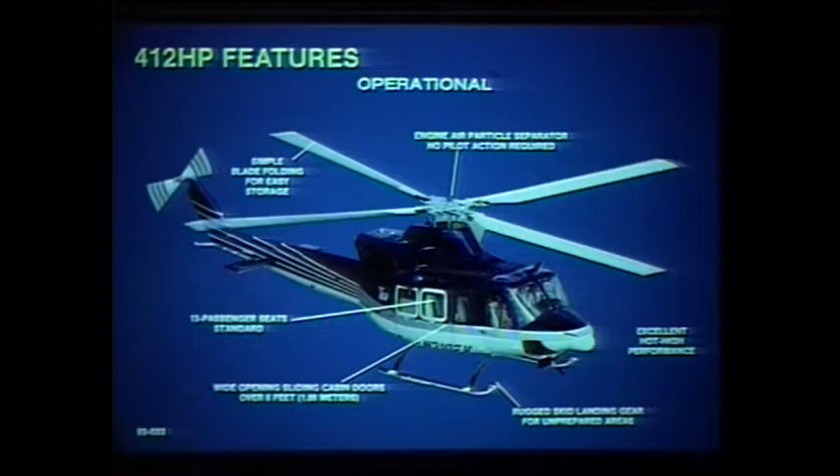Safety is the very highest design priority at Bell Helicopter, and as a result, the 412 is one of the safest helicopters flying in the world today. Main and tail rotor clearances allow safe movement around the aircraft with rotors turning. The Pratt & Whitney PT6 power plant is safe, reliable, and easy to maintain.

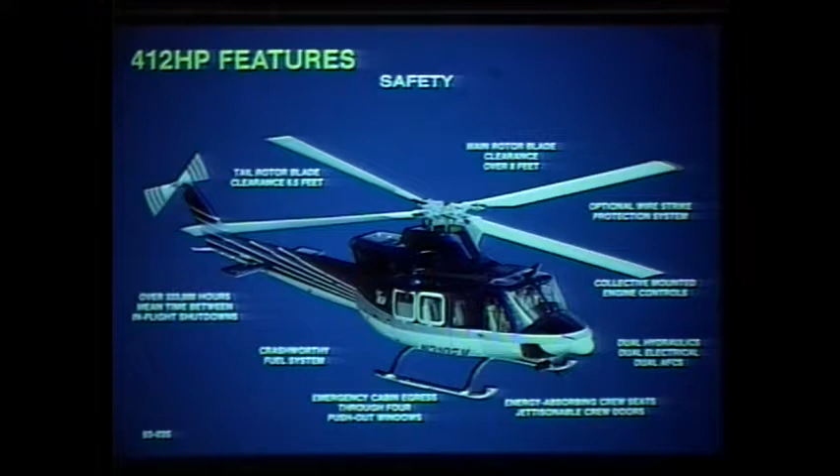Emergency exits are provided by push-out windows in the cabin and jettisonable doors in the crew cockpit. Crew seats attenuate energy to help prevent injury during hard landings. Dual hydraulic, electrical, and automatic flight control systems assure continued safe flight in the event of system failures. Collective mounted throttle controls allow the crew to perform emergency procedures without ever taking their hands off the flight controls. Optional wire strike protection can be added to the upper and lower fuselage to minimize danger of inadvertent wire strikes. The Bell 412 HP, one of the safest helicopters flying today.

The Bell 412 is reliable and easy to maintain. The Pratt & Whitney has a 4,000 hour time between overhaul and 35,000 hours mean time between premature engine removals. The transmission and tail rotor drive systems have 5,000 hours time between overhaul. The main transmission has multiple zone chip detectors to isolate potential problems and debris collectors to prevent secondary damage.

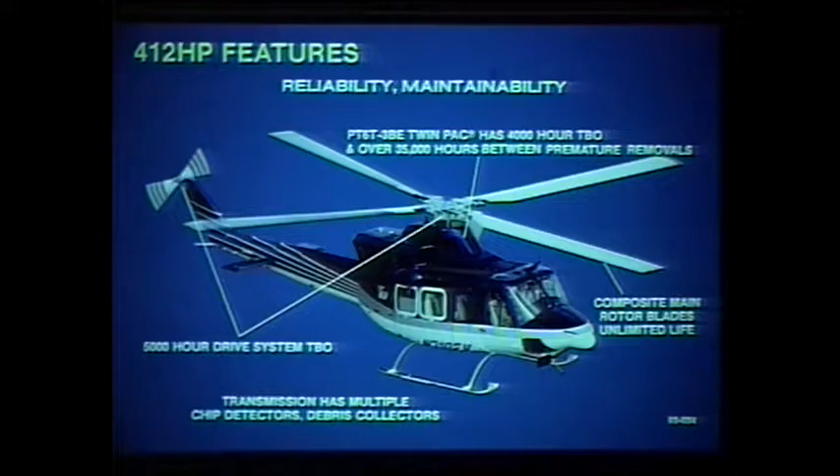The composite main rotor blades have an unlimited life. This unlimited life main rotor reduces maintenance inspections and reduces direct operating cost. The 15-place 412 has a 46-foot diameter, 4-bladed main rotor, large roomy cabin, and large sliding doors on both sides of the fuselage.

The high-performing 412 helicopter in standard configuration can carry a pilot, 14 passengers, and full fuel a distance of 311 nautical miles with 20 minutes fuel reserve.

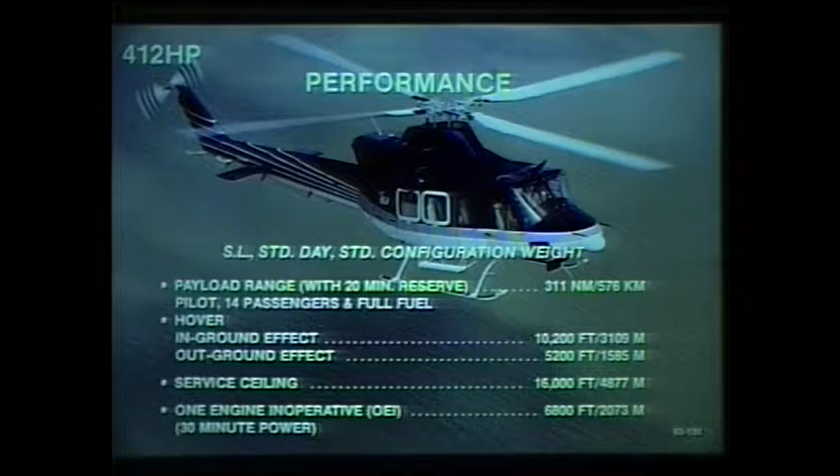Hover performance allows in-ground effect hover up to an altitude of 10,200 feet and out-of-ground effect hover up to 5,200 feet. The normal twin engine service ceiling is 16,000 feet, and with one engine inoperative (OEI), the service ceiling is 6,800 feet. The 412 HP, high performance to meet any mission.

The 412 HP is powered by the Pratt & Whitney PT6T-3D Twin Pac. This Pratt & Whitney PT6 engine is one of the safest and most reliable power systems in all of aviation. The PT6T-3D is powerful, providing 1,800 shaft horsepower to the main transmission.

It's reliable, with 333,000 hours mean time between in-flight shutdown, and it's easy to maintain. It is accessible and has a 4,000 hour time between overhaul.

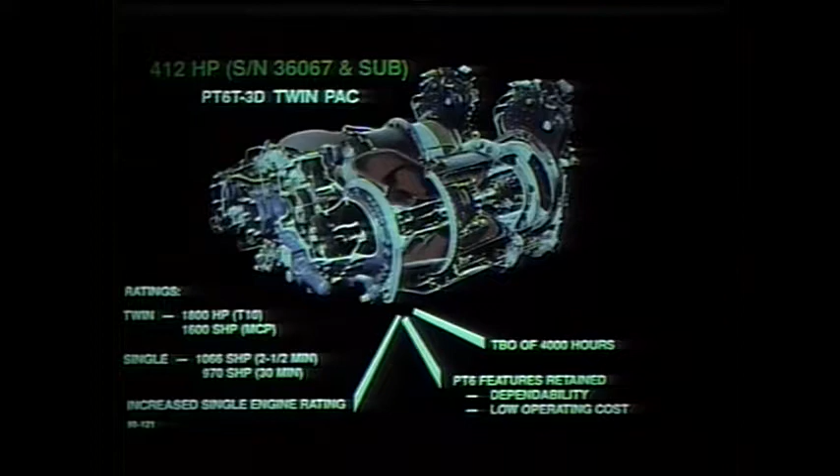The fuel system has been improved from the first deliveries of the 412 in 1981. The fuel quantity has been increased to 330 gallons to significantly extend the range capability. The fuel cells are rupture resistant with flexible lines and breakaway fittings, which help prevent leakage in the event of hard landings. The automatic fuel management system transfers fuel for minimum center of gravity travel at all fuel levels, and the fuel system has single point refueling, even with auxiliary fuel tanks installed.

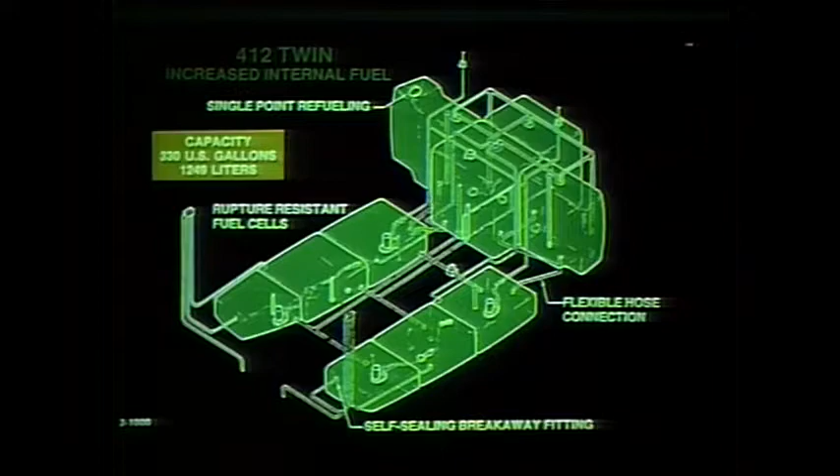The improved 412 HP transmission delivers 1,110 continuous shaft horsepower to the main rotor hub for cruise flight, and 1,370 shaft horsepower for excellent high-altitude, hot day hover performance. The new mast torque measuring system assures the main rotor hub gets all the power it was designed to perform.

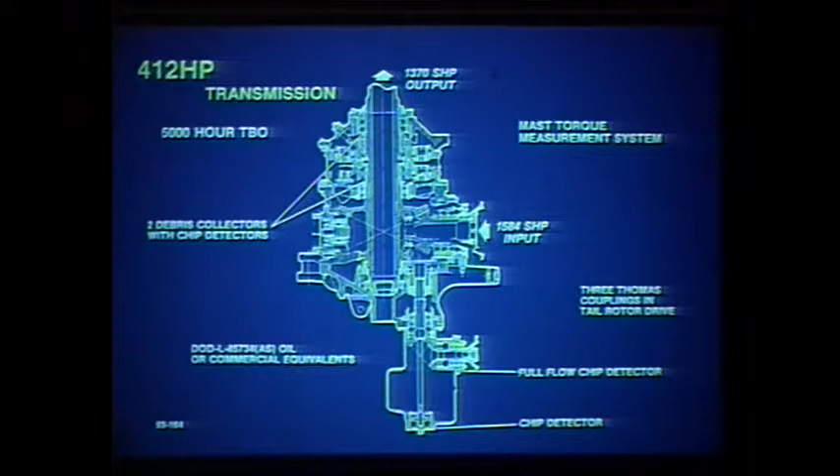The simple 4-bladed main rotor hub is efficient and responsive. The low-maintenance rotor hub incorporates elastomeric bearings that eliminate both mechanical hinges and heavy viscous dampers. These bearings not only improve the ride of the 412, but also extend the rotor system life. The flex beam yoke of the main rotor hub provides quick control response for the most demanding missions.

The unlimited life main rotor blades are exceptionally strong and resistant to corrosion. The latest 412 composite main rotor blades are individually interchangeable and have 3 trim tabs and balance pockets to track and balance the main rotor.

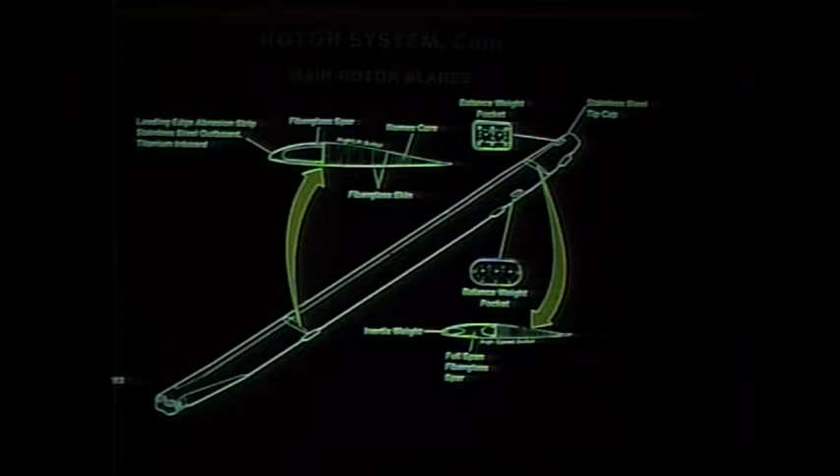The main rotors are easily folded by removing a single quick release pin in opposite blades, then folding one blade forward and one aft. This procedure takes 2 persons about 5 minutes to fold or unfold the main rotors.

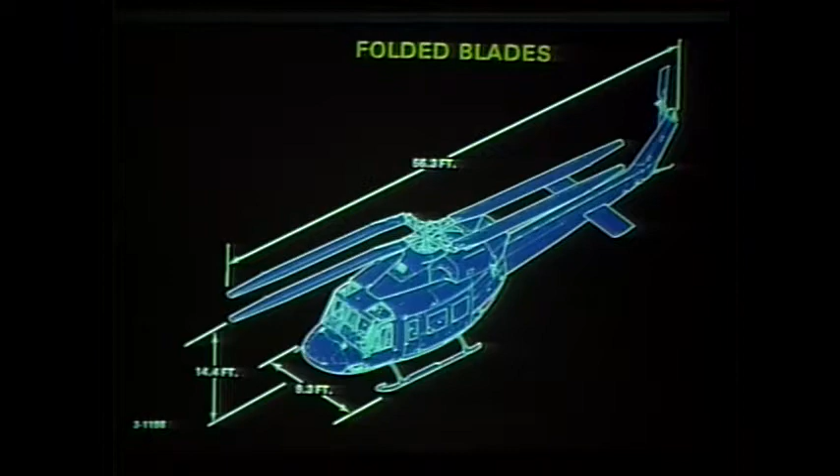The main rotor clearance allows safe movement from all directions around the 412 while rotors are turning. This allows safe loading of patients, passengers, or cargo without stopping the rotors.

The rugged skid landing gear requires very little maintenance and enables the 412 to land on a street, a field, a prepared surface, or unprepared surface. The 412 can virtually land anywhere.

Inside the 412, there's a large cockpit area for the crew and a large roomy cabin for passengers or cargo. A large baggage compartment is located in the tailboom.

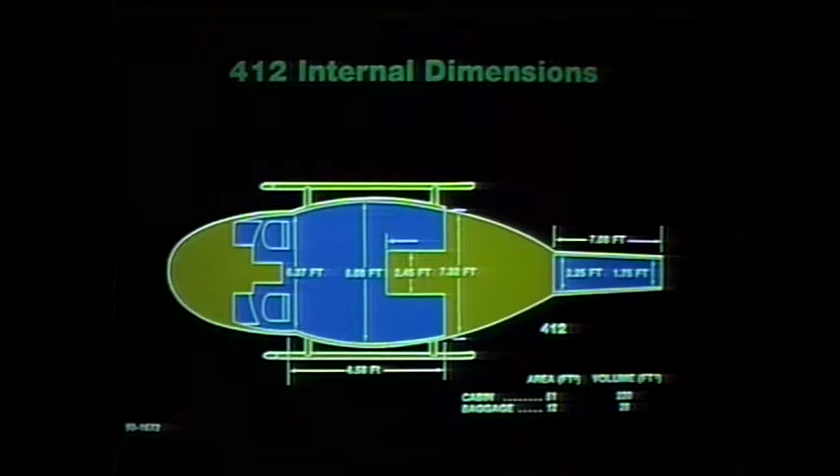Large sliding doors on both sides of the cabin open to over 6 feet, that's 1.88 meters. The forward hinge door extends the door opening to 7.5 feet, 2.3 meters. Inside the cabin there are 51 square feet of floor space and 220 cubic foot volume.

The standard 412 cabin interior offers a choice of 3 different 13-place seating options and custom deluxe or utility interiors. The forward-facing seat option has seats that fold and can quickly be removed or changed to meet your mission.

Inside the 412 cockpit is the pilot position on the right and the co-pilot position or passenger position on the left. The instrument panel and flight controls are designed for safe, efficient flight with minimum pilot effort. The engine throttle controls are mounted on both the pilot and co-pilot collective to minimize pilot workload during emergency procedures. All engine and system monitoring instruments are conveniently located in the center of the instrument panel for viewing by both pilot or co-pilot.

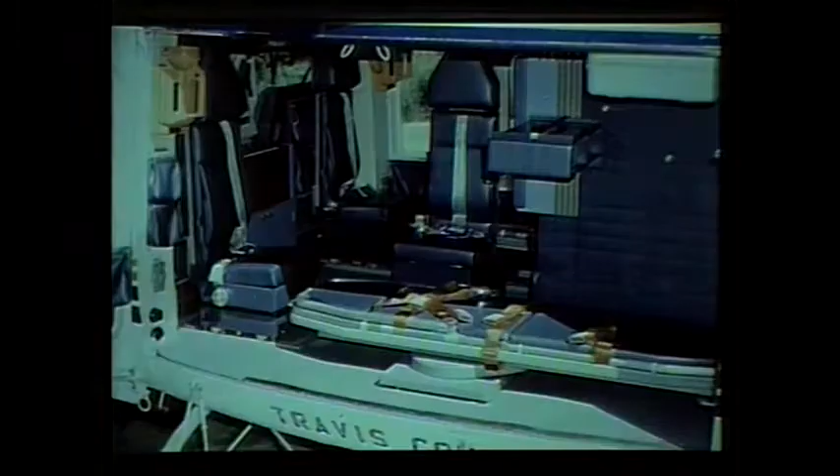The 412 HP is ideal for emergency medical service. A variety of emergency medical interiors can be installed in the large cabin area of the 412. The 412 can be fitted with dedicated medical trauma equipment such as litters, oxygen, suction, defibrillators, etc. Or quick change configuration can add or remove litters in just minutes as required.

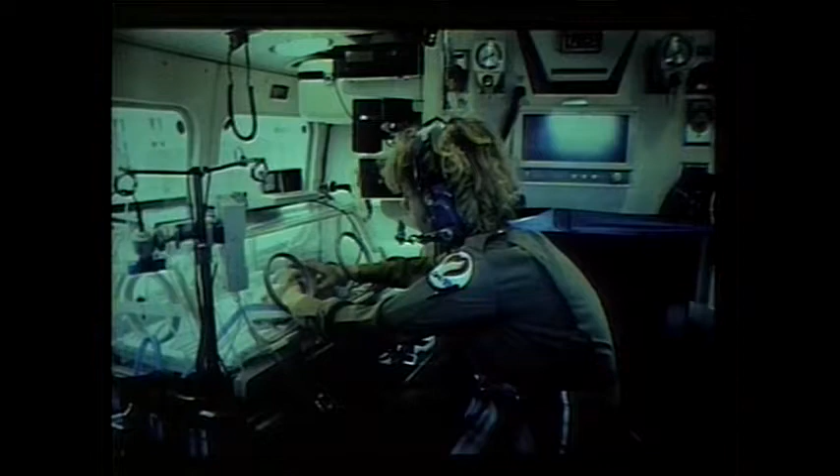The large roomy interior allows transportation of special equipment like this neonatal care unit. 3-place standard NATO litters fit side to side inside the cabin, and high-density 6-place litters fit 3 on each side, fore and aft. Both the 3- and 6-place litter installations have plenty of room in the cabin for medical attendants and equipment.

Other mission equipment includes emergency floats installed on the skid landing gear. In the event of emergency landing on the water, these floats inflate in only 4 seconds and provide 125% buoyancy for emergency evacuation of the aircraft.

External cargo hook carries up to 4,500 pounds of external load. Either 40-gallon or 163-gallon auxiliary fuel tanks can be installed to increase the 412 range up to 528 nautical miles.

The 40-gallon tanks fit under the outboard-facing passenger seats on each side of the transmission island. The larger 163-gallon tanks replace these same outboard-facing seats. Any combination of large and small tanks can be installed.

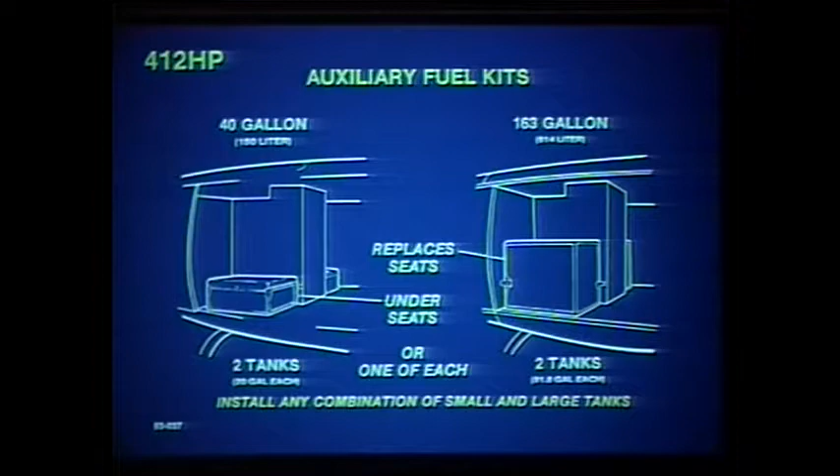Search and rescue is one of the primary missions of the Bell 412 HP helicopter. The 412 HP responds fast and special mission equipment enables the 412 to rescue large numbers of victims in all kinds of weather. Many police departments, coast guards, and militaries use the 412 for search and rescue.

The external hoist mounts on the upper fuselage, and the internal hoist mounts inside the cabin in one of 4 locations. The internal hoist can be installed or removed in only minutes. Both hoists carry up to 600 pounds from the water or ground below up into the cabin.

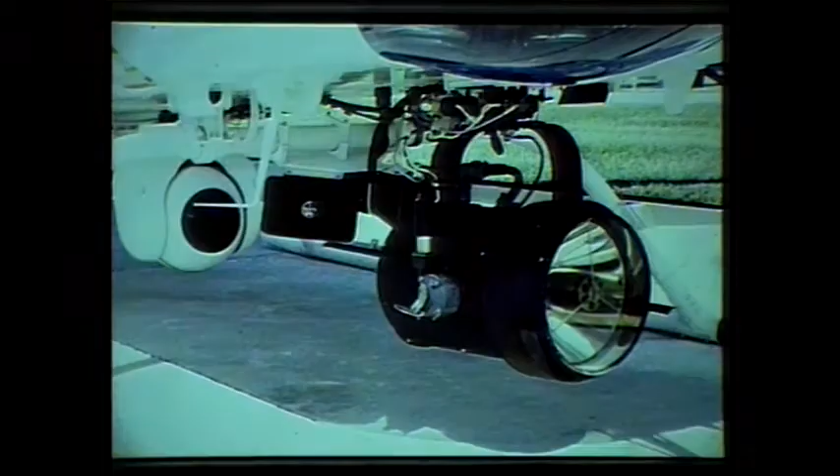The Night Sun searchlight illuminates large areas to aid in the search at night. Note the lower wire strike protection system mounted in front of the searchlight. And to aid in the search, the forward-looking infrared FLIR system can also be installed with monitor mounted in the cockpit or cabin area. Bell Helicopter has just certificated an integrated SAR system on the 412 HP.

This system includes 4th axis autopilot for collective, automatic approach to hover capability, 5-tube electronic flight instrument system, hover display and mapping on the electronic horizontal situation indicator, and advanced weather and search radar.

This complete search and rescue is accomplished with complete automatic flight without even touching the flight controls. The 412 HP flies a predetermined search pattern. The rescue scene is located and the pilot rolls heading selection toward the rescue area. The pilot flies directly over the rescue scene and selects mark on target.

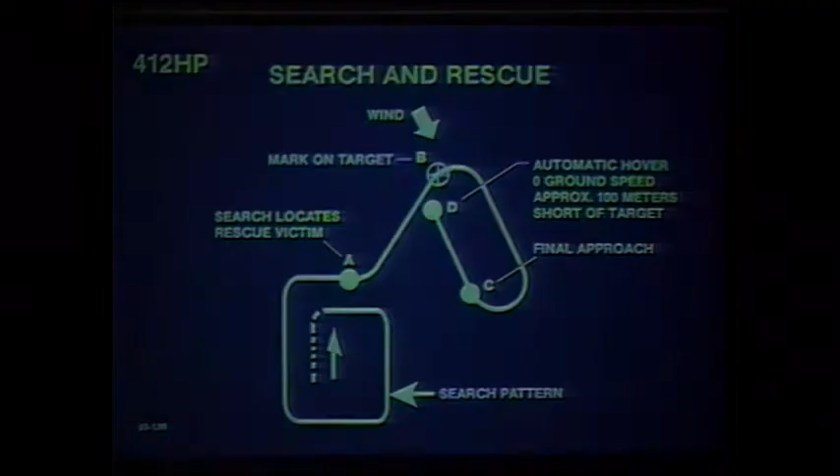The 412 determines the direction of the wind and automatically turns the helicopter into the wind, starting final approach. Approach terminates at 0 ground speed and begins automatic hover approximately 100 meters short of the rescue target. The initial approach to hover begins as the 412 HP decelerates to 60 knots and descends at 500 feet per minute to 200 feet above the ground or water level. At 200 feet, it descends to selected altitude and 0 ground speed.

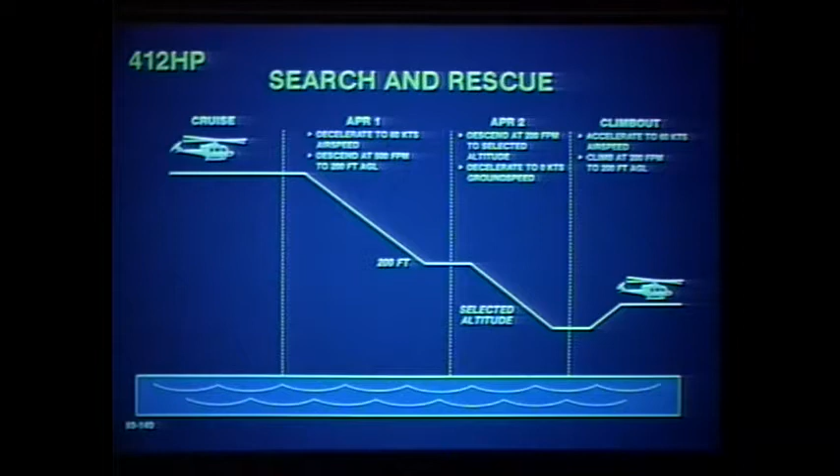After the rescue is complete, the pilot selects climb out, and the 412 climbs at 60 knots and 200 feet per minute until the pilot selects speed and altitude to return to base. The entire search and rescue is accomplished with fully coupled automatic flight.

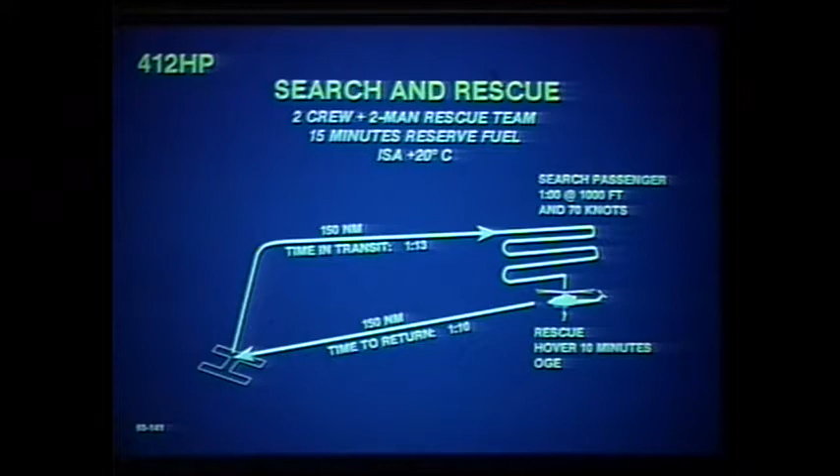The 412 HP can fly 150 nautical miles in 1 hour and 13 minutes, search at maximum endurance speed for 1 hour, hover out of ground effect for 10 minutes during the rescue, and return 150 nautical miles to base with 15 minutes reserve fuel. A very demanding mission for a very capable 412 HP helicopter.

The 412 is well suited for anti-terrorist operations, responding quickly with troops and equipment to combat any situation. Rappelling operations can put policemen or troops in hard-to-reach locations.

The 412 is the helicopter of choice for military commanders in more than 20 countries around the world. The 412 can unload 14 fully equipped troops to remote areas in only seconds.

Inside the cockpit, optional armored seats protect the crew from small arms fire, and the large, roomy cabin seats 13 fully equipped troops. The large sliding door allows rapid troop loading or deployment, even with a door gunner in position.

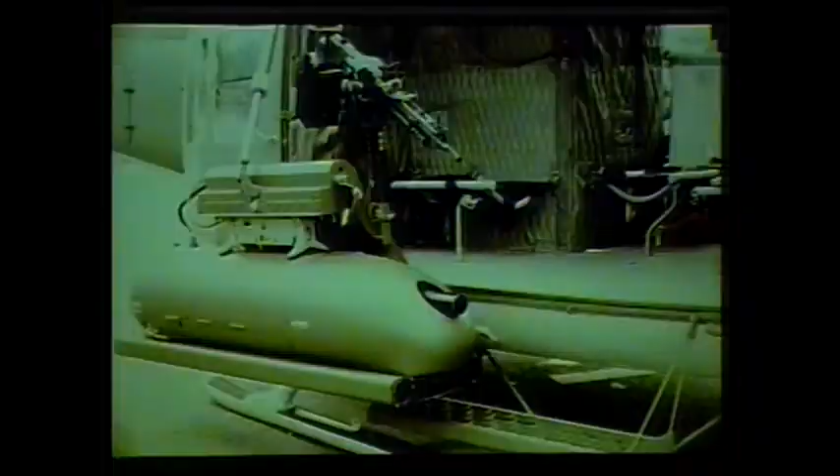A wide range of armament systems can be installed on standard hardpoints located on both sides of the fuselage. The Fabrique Nationale HMP has a 50 caliber machine gun, 4 2.75-inch rockets, and a 7.62 millimeter pintle-mounted door gun. Or the FN external mounting attachment with rocket launcher and door gun.

The 412 can even be equipped with a fully qualified 50 caliber Lucas turret machine gun and 800 rounds of ammunition. Whatever the mission, the 412 HP responds quickly to meet any adversity.

The direct operating cost of the 412 HP is $606.92 per hour. This includes both scheduled and unscheduled maintenance, assuming fuel and lubricants at $1.50 per gallon and labor cost at $45 per hour. Compared to any comparable size helicopter, the 412 HP has the lowest direct operating cost.

After delivering 32,000 helicopters to 120 countries, it is no surprise that supporting these aircraft is a very important and large part of Bell Helicopter business. Almost a third of our total business is dedicated to product support. Our total support organization provides spare parts, training, technical support, technical publications, warranty administration, and financial administration.

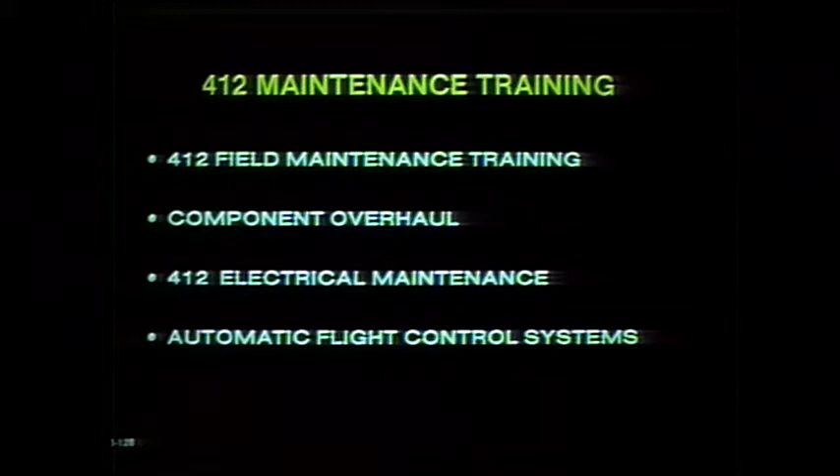Bell's Training Academy offers a full range of 412 pilot training, from transition and recurrency training to airline transport pilot and external load operations. 412 maintenance training includes courses on field maintenance, component overhaul, electrical maintenance, and automatic flight control systems.

Technical services include 42 customer support representatives who are factory trained and located worldwide to provide technical support, warranty assistance, on-the-job training, maintenance planning, and product support engineering coordination for operator maintenance personnel. These customer support reps are qualified airframe, engine, and avionics experts, available for you whenever you need them.

Every 412 HP delivery includes complete publications and revision service. Manuals, catalogs, and price lists are updated for the life of your helicopter. The bulletin program covers safety aspects and customer information, including faxes, telexes, alert service bulletins, service instructions, and information letters.

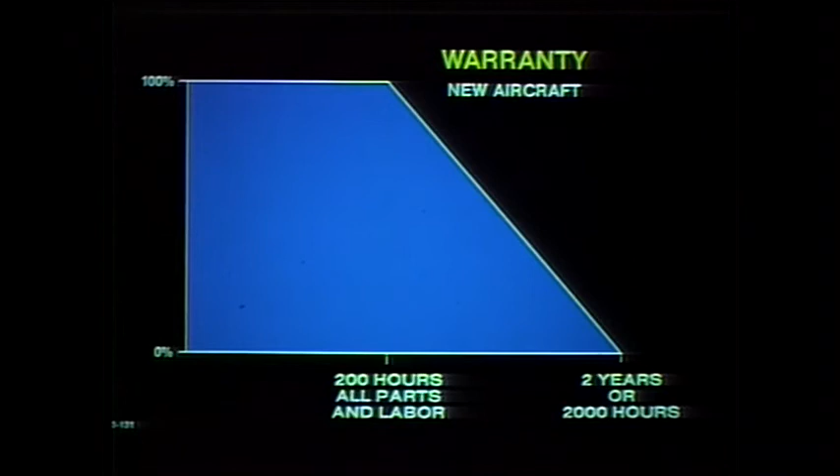Bell Helicopter warranty on the 412 HP is 2 years or 2,000 hours, prorated after the first 200 hours. This is one of the best warranties in the helicopter industry.

Bell Total Support Organization wants to be most responsive to customers' needs by supplying the very best quality aircraft, parts, and equipment. Bell Helicopter is committed to continuously improving safety, availability, product development, support, and cost of operations. The Bell 412 HP high-performance helicopter is proven safe and dependable to meet any mission, in any weather, any place.

At Bell Helicopter Textron, we're not satisfied with just being the most experienced helicopter company in the world. We want to be your helicopter company.